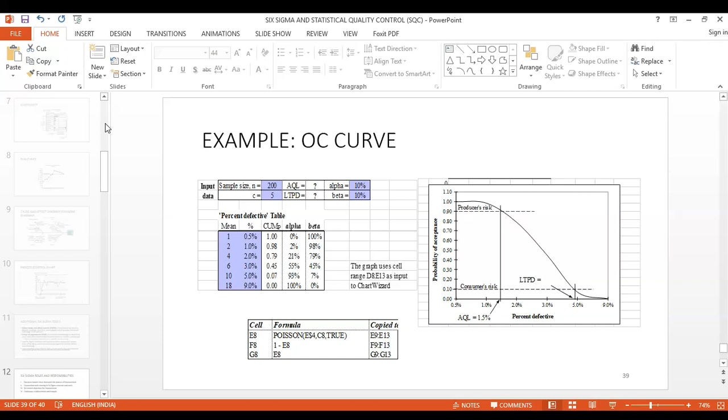Hello, good afternoon. Today we will be discussing a very important topic in operation and supply chain analytics, and the topic is Six Sigma and statistical quality control.

Six Sigma is a very important concept. It's a philosophy and a set of methods companies use to eliminate defects in their products and processes. Many companies mention in their publicity material, website, or marketing presentations that they stick to Six Sigma quality in their operations, manufacturing processes, or service operations.

Basically the purpose of Six Sigma is to reduce variation in processes that leads to product defects. Ultimately, Six Sigma is a quality initiative, a quality method that companies use, and they want to reduce a measure called DPMO.

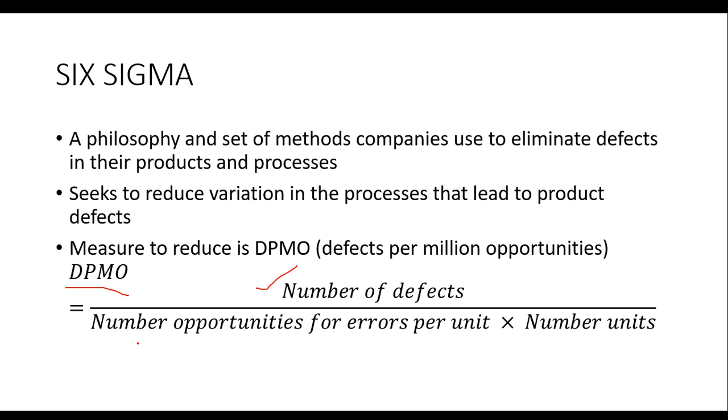The intention is to reduce the number of defects in a service process or manufacturing process, manufacturing unit, or service instance, to reduce the defects per million opportunities as much as possible. You can only reduce something when you are able to measure it, so DPMO is a good measure.

So in Six Sigma, the way to go with this method is the DMAIC cycle, which is a very popular acronym. D in DMAIC stands for Define. In Define, you identify the customer and their priorities.

In M, you Measure. Once you know what specification the customer wants, you determine how to measure the process, how to measure that particular specification or parameter or quality characteristic, and how it is performing. Once you measure it, then you Analyze it.

You analyze what is causing that defect or that particular problem or issue. Once you measure it and know it's above a limit or problematic, you analyze the likely causes. And once you know the causes, you try to remove those causes of defects - you try to Improve on it.

And then next is Control - how to maintain the improvements and keep continuously improving. The DMAIC cycle is an ongoing effort. Once you do a DMAIC cycle, you improve the quality to the certain specification you want, and in future you want to repeat it so that some other parameter would have gotten a defect.

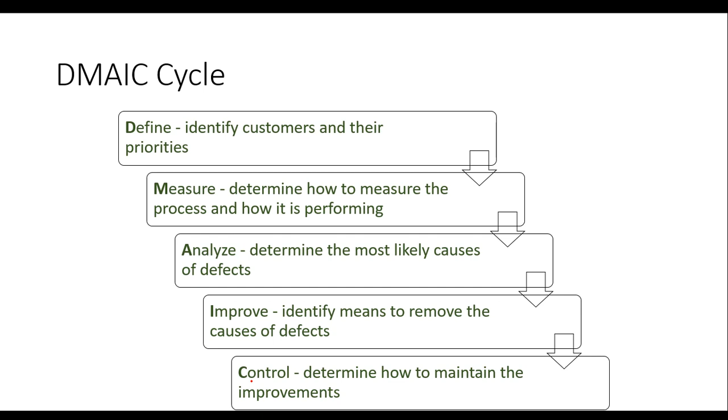So what are some quality tools in Six Sigma? First is a flow chart, which you use once you try to operationalize Six Sigma. Some analytical tools are helpful, and the first tool is a flow chart which gives you a sequence - I'll show you in a while. First is a flow chart, which is a diagram showing sequence of operations.

Then there are run charts, which show trends in data over time. Pareto charts - we'll take flow charts and run charts, then Pareto charts help break down a problem into components. Check sheet is a basic form to standardize data collection. Cause and effect diagram, also called fishbone diagram, shows relationship between causes and the problems due to those causes. Opportunity flow diagram is used to separate value added from non-value added in a flow chart.

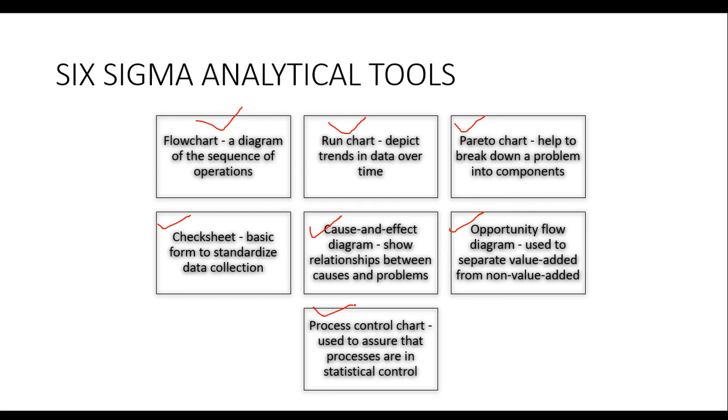In process control chart, we will be discussing in detail today. We will be looking at how to assure that processes are in statistical control. So let's quickly look at these one by one.

First is a flow chart, and it shows the major steps in a process. It's a simple process shown here where you're trying to take a photocopy of an original document. So process steps are: put original in the glass, close lid, adjust setting, press start, and remove. Once your copy is done, you remove the originals, right? These steps can be easily shown using the flow chart, showing the suppliers, the input, the process, the output, and who the customer is.

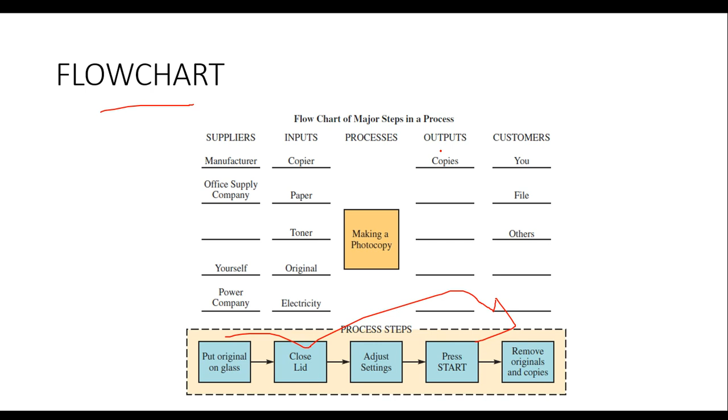Next is the opportunity flow diagram - the same flow chart where you put what is value add versus non-value add. You can see the same diagram of taking a photocopy of a document, where all the value-added activities, where some activity is happening that adds value to the whole process or flow, is shown on the left side, with a dotted line separating it. On the other side you put all the non-value add activities. Sometimes you can also highlight value added versus non-value added using colors, but most of the time we show them in two separate sections.

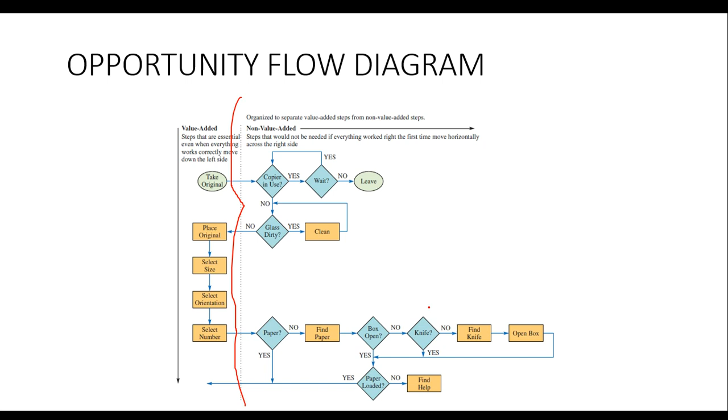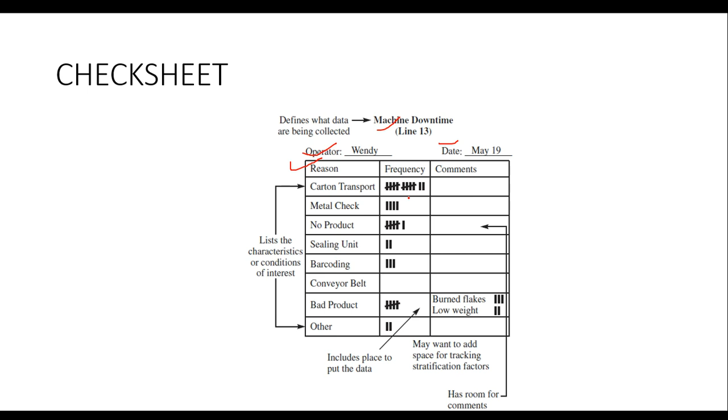Next is the check sheet, used when you want to collect data - this is important for data collection efforts. The check sheet basically defines what data is being collected. Suppose someone on the factory floor wants to track machine downtime and see the common causes. A particular person on a particular date records the reason for machine downtime. All the reasons are put in one column, the frequency of each problem in the second column, and comments are also given. This way you can easily check the most common causes for machine downtime and take steps to improve on that.

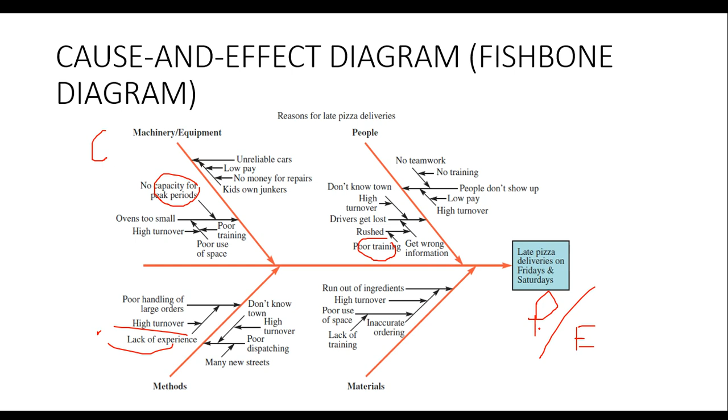We further break down these machine-related causes one level down, and if we keep drilling down, we can figure out that maybe it's capacity issues for peak period, and maybe poor training, or it could be lack of experience of the cook to handle large orders. These are the possible causes, a few among the many causes which are eventually leading to the effect or the problem. Once we are able to figure them out, we can take efforts to address those causes and improve on them.

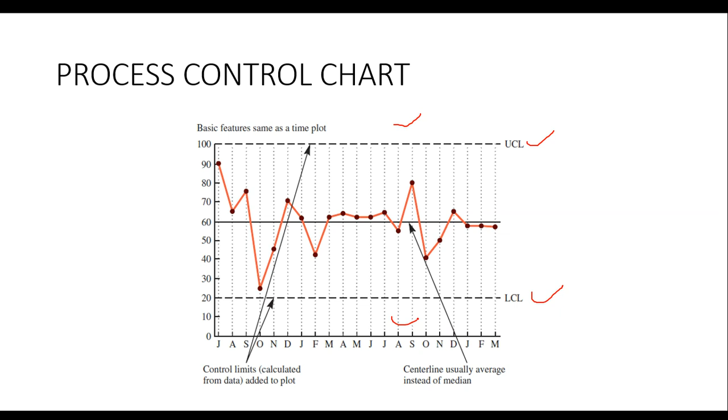Next is process control charts, using statistical quality control. We look at some characteristic of a process, measure it, and it shows the mean line, the upper control limit, and the lower control limit. If the process characteristic we are measuring remains within the upper and lower control limits, that is okay - it should be around the mean. But if it goes above the upper control line or below the lower control line, then there's a problem, and we should try to address it. The center line is usually the average, and we will discuss more about process control charts as we cover statistical quality control, which will give you more clarity.

A few other Six Sigma tools used are failure mode and effect analysis, FMEA. What you do is look at the possible failures at each stage of the process, identify them, and then estimate and prioritize the possible risk at each stage. Once you know the different risks in each stage, you prioritize them, then evaluate and try to address them.

Design of experiment is a statistical methodology to determine the cause and effect relationship between process variables and output. Suppose you have many process variables - you permit experimentation with different combinations of variables and their values, and determine the effect on the final quality characteristic that you're interested in or want to control.

Lean Six Sigma is also very buzzword nowadays. Basically, Lean Six Sigma combines the quality control tools of Six Sigma with the inventory management concept of lean manufacturing. So it's about reducing waste and keeping inventory wastage as low as possible, while putting Six Sigma process control in place to achieve high quality with low wastage and low inventory.

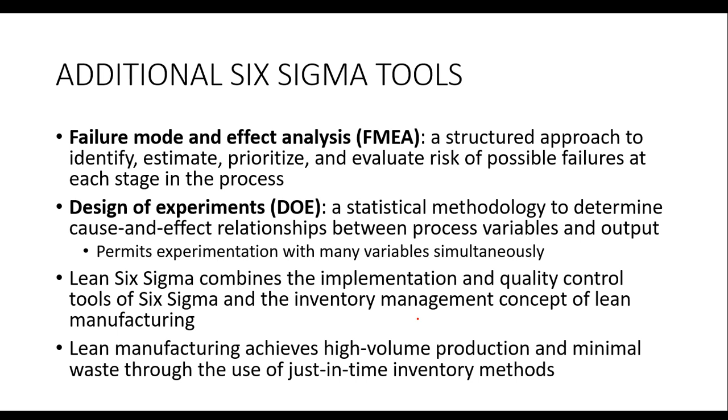Lean manufacturing is very popular nowadays. It's basically about minimal waste and using concepts like JIT, just in time inventory methods. You can always mix it with Six Sigma and come up with Lean Six Sigma in service operations or in manufacturing operations. So what are the roles and responsibilities when an organization is trying to implement Six Sigma?

Of course, the executive leadership must champion the process of improvements. So once top management is championing the cause, then you have corporate wide training in Six Sigma concepts and tools. Once people are trained and know about Six Sigma tools and how to implement them, management should give them stretch objectives for improvements, with continuous reinforcement and reward.

So it should not be a one time motivation. It should be continuous reinforcements, and reward should be provided so that people remain motivated and keep on implementing Six Sigma continuously.

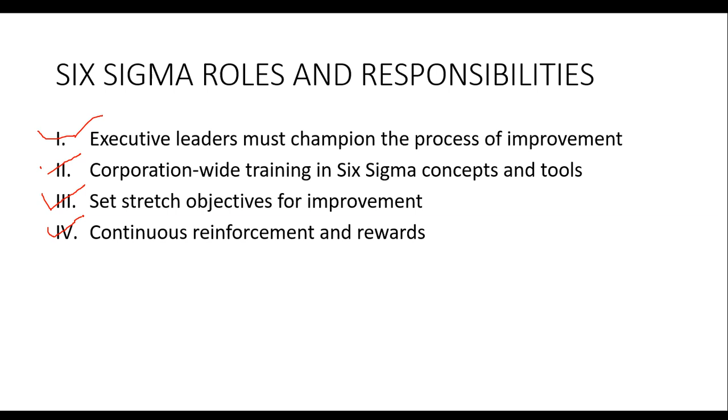So okay, let's talk about Six Sigma. So you could have made sense of the DMAIC cycle and using the different tools. Of course, some statistics is involved in implementing Six Sigma in detail, while it comes to service operations or service processes or the manufacturing operation processes.

So now let me take you through some concepts of SQC, or statistical quality control, so that some statistical terms that we use while we talk about Six Sigma become clear to you.

SQC is a wider concept than Six Sigma, and it talks about a number of different quantitative techniques to basically evaluate quality from the conformance. We want a certain quality characteristic to be of a certain, prefixed quality parameter value, and then we can evaluate quality whether it's conforming to that particular measure or standard, and then once we evaluate it vis-a-vis a standard, we know how to improve on it.

Because we know a process inherently has some variation. In manufacturing, and in service operations in particular, there's a lot of variation because humans are involved. But in manufacturing processes also, even machines are working, we have some variation in the output. We will discuss just in 2 minutes more about that.

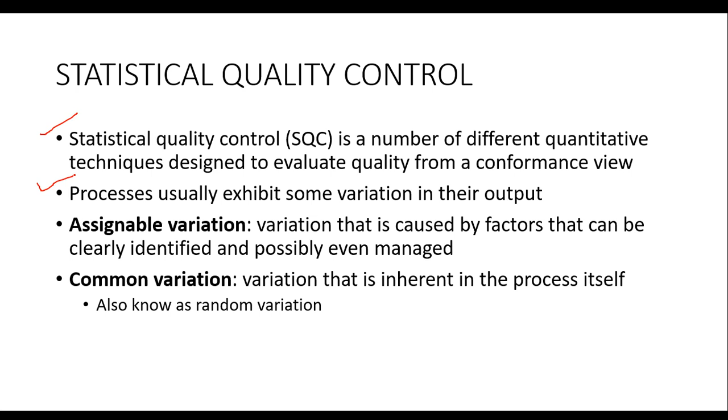So assignable variations are ones where we can identify the factors that are causing the variation, and then manage those factors. But some variations, common variations, are inherent, so sometimes they are also known as random variations. We don't know what the causes are, and however much we manage those factors, they still remain in the process.

So one common way to measure variation is the mean. So you have the average value of a set of numbers. Suppose you have an observed value, so you have a sample of n, and n can be any number, let's say 10. So in 10 observations of, say, a diameter of a tool, which is supposed to be 1 inch, you observe it's 1.1, 1.2, and so on. You average those observations over the total number of observed values, and you get a mean.

In a set of numbers, standard deviation is a measure of variation, and the variation will be around the mean, of course. So standard deviation is a measure of variation in a set of numbers. It's denoted by a sign called sigma.

There are many different ways to calculate it, depending on what distribution it is following: normal distribution, Poisson distribution, or uniform distribution. But one common way to calculate standard deviation is: take the observed value, the difference from the mean of the sample, square it, sum it from i to n, take the square root, and divide this by n, the total number of observed values.

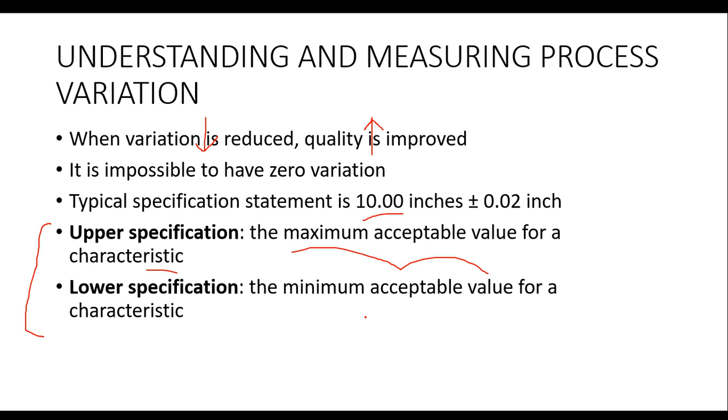So let's talk about two things which are very important: specifications. When we talk about upper specification, it's the maximal acceptable value for a characteristic, and lower specification is the minimal acceptable value for a characteristic.

You have to understand there is a difference between process limits, process control limits, and specification limits. Suppose we want to measure process capability. Capable means the mean and standard deviation of processes are operating such that upper and lower control limits are acceptable relative to upper and lower specification limits.

So if the upper and lower control limit, or the variation within the process, with a certain high degree of certainty - so process variation is less than what variation is allowed by the customer - then we say the process is capable. In other words, process control limits are less than the customer specification limit.

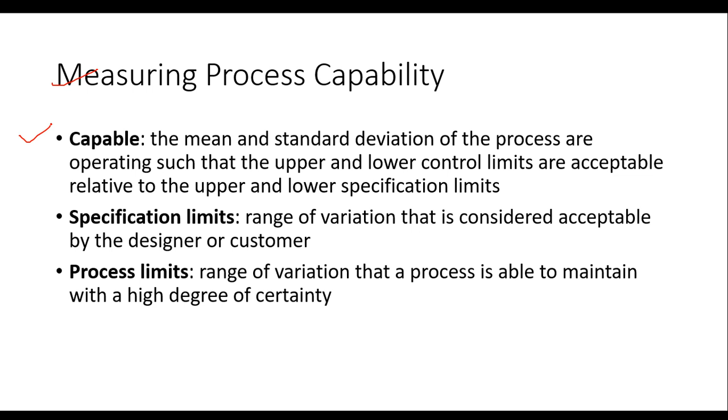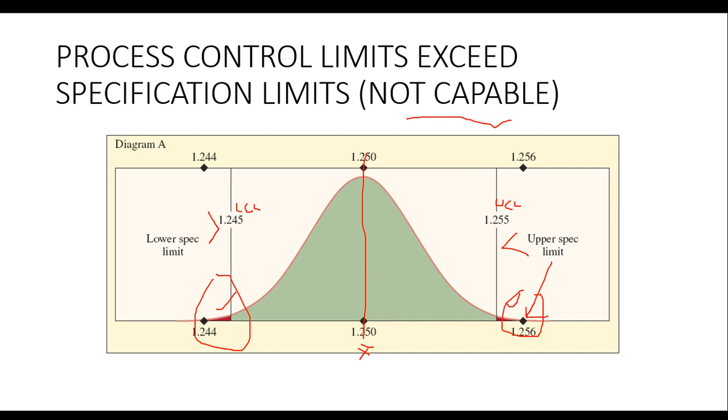But you can see your process specifications are here. This is more than that, and in the negative sense it is also more than this. So you have variation here and variation here. This means the process is not capable because your process is varying more than what the customer would have allowed through using control limits.

Let's see one example. Here it is lower control limit, this is upper control limit, this is something that is allowed by the customer, and here is your process. Now the mean remains the same, but the process upper specification limit and the lower specification - now you can see they are less, and here this is also in terms of negative it is, yeah.

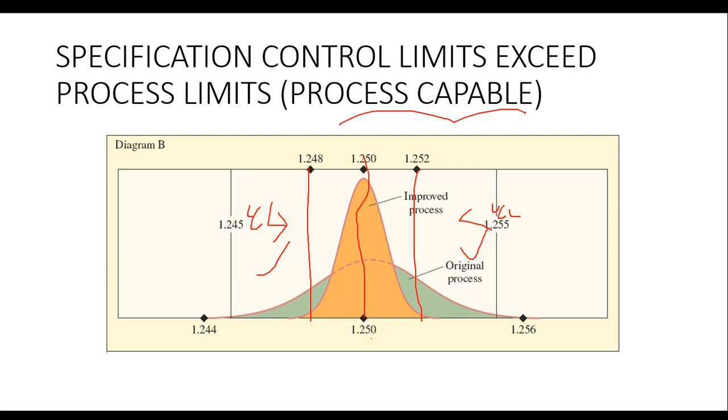So this is good and this is good - now you can say your process is capable. Your process specification, the variation in the process is less than what the customer specification or design specifications are for that particular process. How do you measure it?

One way to do that is with a ratio. We have a process capability index. It's a ratio of the range of values produced divided by the range of values allowed. So basically...

Process capability index, CPK, is equal to the minimum of either: mean of means minus lower specification limit, divided by 3 sigma (which is 3 times standard deviation); or upper specification limit minus mean of means, divided by 3 sigma. This shows how well the parts being produced fit into the range specified by the design specification. Normally we would like to have CPK larger than 1. So if the minimum of these is more than 1, that means the process is capable.

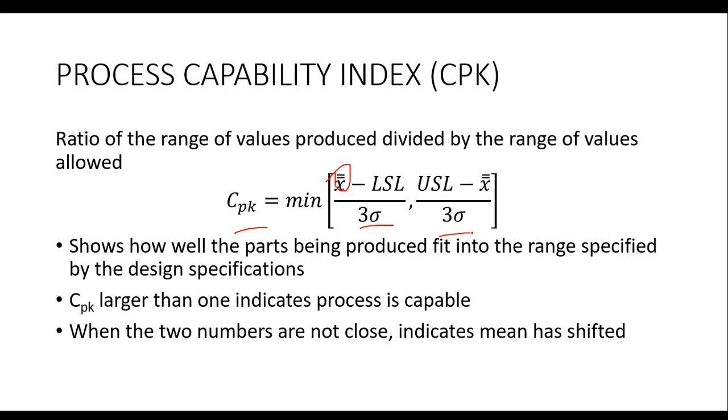When the two numbers are not close, that means it has shifted. Let's look at one example where there's a manufacturing process where you're putting pressurized oil in an aerosol - like putting a deodorant in an aerosol can.

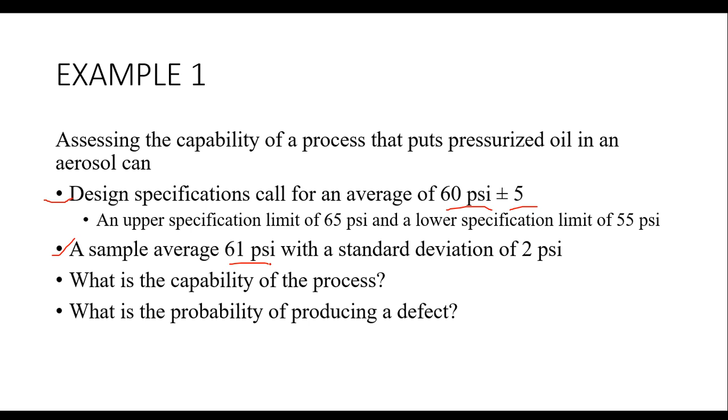The design specification says the upper specification limit is 60 pressure plus 5, so 65, and the lower specification is 60 minus 5, so 55. So 55 is lower control limit, 65 is upper control, and average is 60. Then you figure out the sample average, which is mean of means, is 61 psi pressure, and standard deviation is 2 psi. Let's figure out whether this process is capable or not.

First we interpret the data: lower specification limit is 55, upper specification limit is 65, mean of means is 61, standard deviation is 2. We calculate the process capability index, which is the minimum of 1 or 0.667. It comes out to a minimum of 0.667.

This means it's not a very good capability index. This process capability is not good, and it can definitely be improved. We can also use this information to calculate the probability of a defect using statistics, and Z, as we all know, is the difference between observed minus mean of means divided by standard deviation.

So Z at 55 is minus 3, and Z for 65, upper control limit is 65 minus 61, that is mean, divided by sample standard deviation. It comes out to be 2, and we find the P value at both points. P value at minus 3 is 0.00135, and at normal distribution for 2 is 0.0228. So P of less than 55 or more than the upper area comes out to be 0.024.

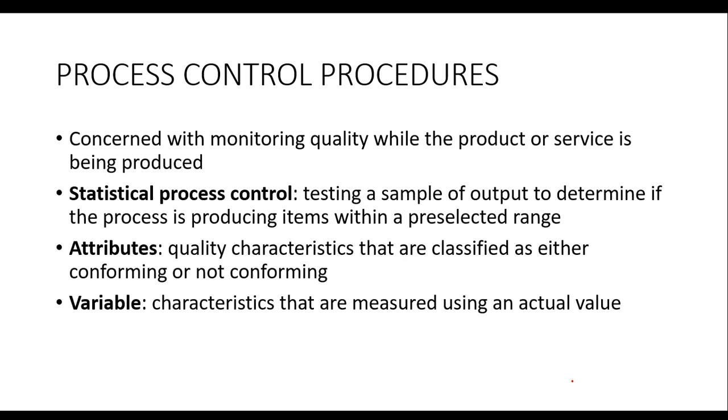Suppose we are making an aerosol can, just for example, and we take the pressure in that can. This is a variable, a characteristic which we're going to measure - we actually measure the pressure, and this is a variable of interest to us, a quality characteristic. Whether it conforms to 60 psi or not, that could be an attribute, a quality attribute that needs to be adhered to. So we measure the variable and then see whether it meets the particular attribute value assigned for quality measurement or not.

Process control charts were explained earlier in this presentation, but we'll come back to it. Once you have the lower control limit and upper control limit, you measure this characteristic, and the center line is of course the mean. Then you keep measuring this quality parameter, the particular variable, taking values, and it stays around the center line, which is normally the mean. If it is around this, it's normal behavior. But if one point goes above the upper control limit, that is a cause of concern. And if there's a point below the lower control limit, then we say the process is going out of control and we need to put it back in control.

If there are 2 points near the upper control limit, also investigate for the cause of poor performance. Similar for 2 points near the lower control limit. 5 points on the same side of the mean line and continuously rising also calls for concern. Similarly for the downside. A trend in either direction is a cause that it may eventually go out of control, so that needs to be checked. Same for a sudden change in level or erratic behavior - that needs to be addressed.

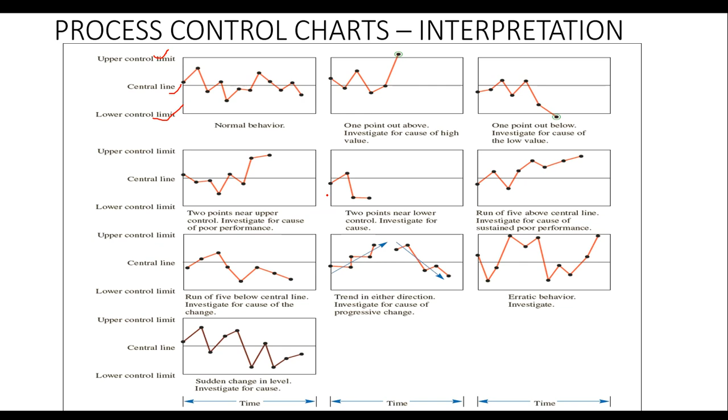So if we are measuring the quality parameter or variable and plotting it on a control chart, we can keep the process in control through graphical inspection and take remedial steps. There are three things which are very important when we do these charts - three types of control charts that are very popular. One is called the P chart, then X charts and R charts. Let's look first at the P chart.

P charts are basically used when an item or service is either good or bad - a yes or no decision. We normally say P bar is the total number of defective units from all samples divided by the number of samples and sample size. This is the formula. Standard deviation of the sample is basically this probability times 1 minus P, divided by the sample size.

Upper control limit is the probability of defective units among all the samples plus Z times the standard deviation of the probability curve. Our lower control limit is the mean value minus, or this probability of defective units among all the sample units, minus Z times the standard deviation, SP. In this case either it's going to be 0 or this value P minus Z times SP, that's the lower control limit, and upper is P bar plus Z times SP. We normally take Z equal to 3 because of the 3-sigma rule.

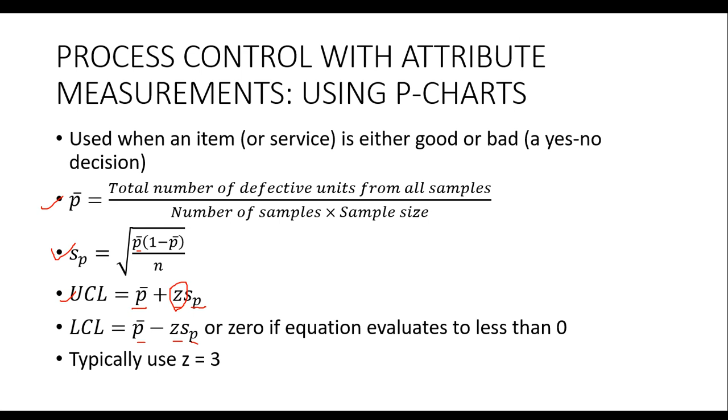Let me show you how to create P charts. First we calculate the sample proportion for each sample - we're going to have one solved example that will clarify this. Then we calculate the average of the sample proportions, calculate the standard deviation of the sample proportions, calculate the control limits, and plot the individual sample proportions.

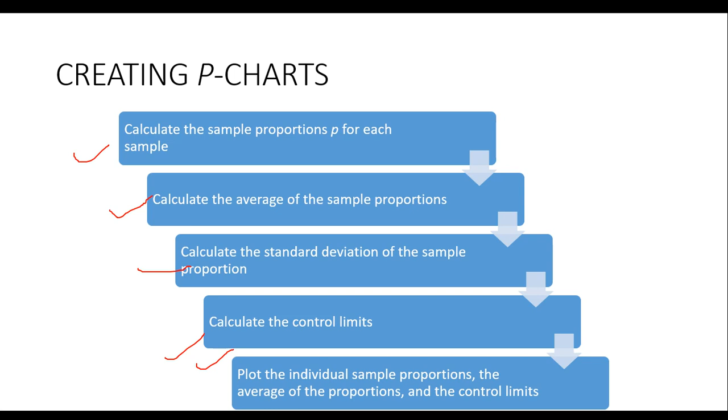Let's look at this number. We have 10 samples, and in each sample we have 300 units. These are the defective units, the defects. So you can see this fraction defective is 10 divided by 300, this is 8 divided by 300, this is 9 divided by 300, and so on for all 10 samples of 300 each. So total sample is all samples, and the total size is...

3000. Among all 10 samples, the total number of defective units is 91. So this p bar will become 91 divided by 3000 for the 10 samples with sample size 300, which becomes 0.03, and the standard deviation SP is 0.0099.

So upper control limit becomes p, which is 0.03, plus 3 times 0.0099. Upper control limit becomes 0.06, and lower control limit is 0.03 minus 3 times this, so it becomes very small, around 0.00063.

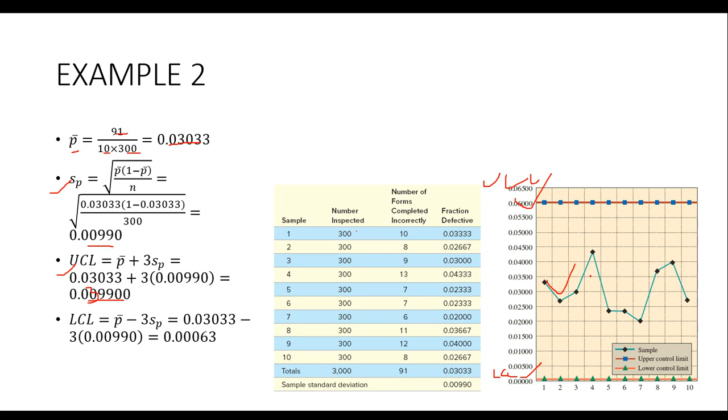So this is the upper control limit, this is the lower control limit. Then you plot all these fraction defective values here, all the values here, and clearly all of them fall between the limits, so our process is in control, we can easily say that.

X chart and R chart, we draw using the same approach, but for the X chart, the upper control limit is the mean of means plus A2 times R bar, and the lower control limit is the mean of means minus A2 times R bar.

Normally when we take a sample, the size is small, around 4-5 units, but the number of samples can be 25-30, a large number of samples. There's a trade-off between cost of sampling and the benefits of it, so you have to balance the cost of sampling against how big you want the sample size, the sampling effort, to be.

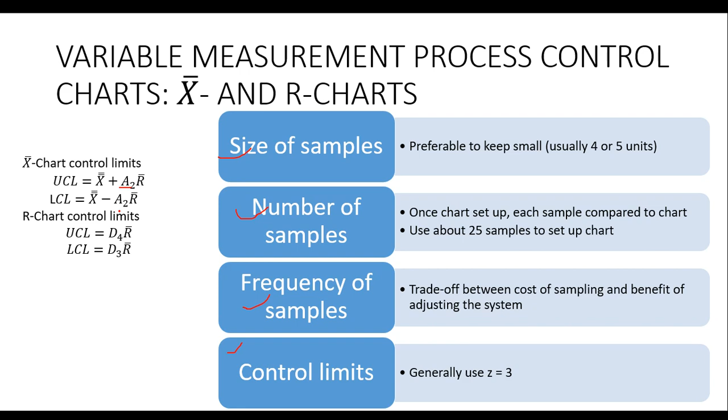For the control limit, this value is A2. Normally we take this value to be around 3. This A2 is basically like a Z value, and like I showed you earlier in P charts, here also we take this value to be 3. So let me give you an example using a can filling machine in Microsoft Excel.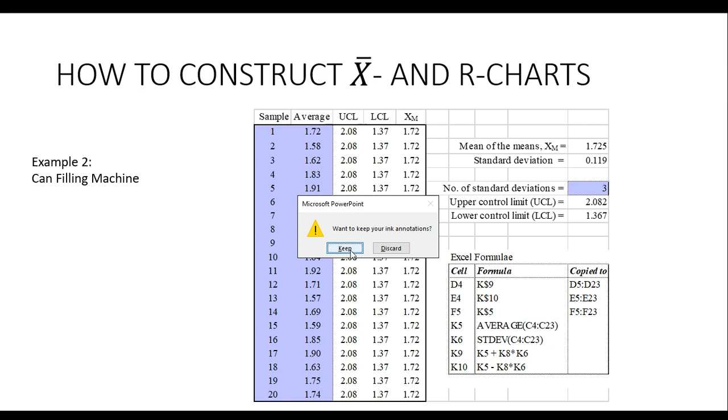If we come here, you can see we have taken 20 samples, and for each we take the average. And here is the mean of means, meaning whatever the sample means are, we have taken the mean of those again.

So we can say equal to average, and we can select, and then this is the standard deviation of them.

The Z value we have taken as 3, so upper control limit becomes mean of means, 1.7, plus 3 times the standard deviation. So this value becomes this, and this is the lower control limit. The same values go here, all the upper control limit values here and the lower control limit here.

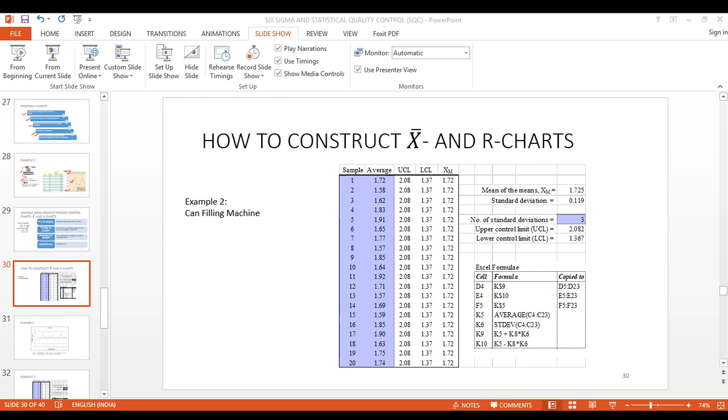Now let's come back to R charts. Let me show you how to calculate R charts, again taking you through Excel. In the R chart, of course, you have the sample, then you have the range given, and the mean of ranges, which is the average of all these ranges.

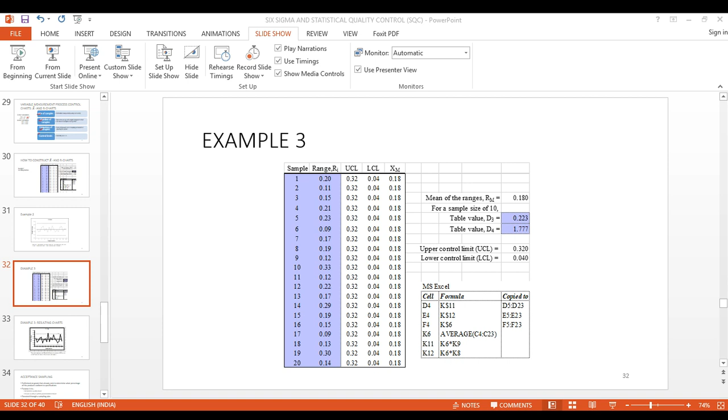Now let's look at, so we just discussed an ongoing process, but sometimes in a warehouse you get goods delivered to you. So far what we have done is, at the organization level, how to set up the quality process using Six Sigma. Then we understood what is statistical quality, and some tools available to us. Then we said, suppose some process is running, how to implement sampling, how to implement the quality process measurement and statistical quality control into it.

The next case is suppose you have a finished good, you're dealing with finished goods in inventory, you export or import some item, and the goods have come to your warehouse, and in the inventory you want to see what is the quality. So one way to do this is, on goods that already exist, we try to figure out what percentage of the product conforms to specification.

And then we try to do it, why we do that is to determine the quality, and make sure that once we know what is the quality level in that particular inventory, the quality is within the predetermined level.

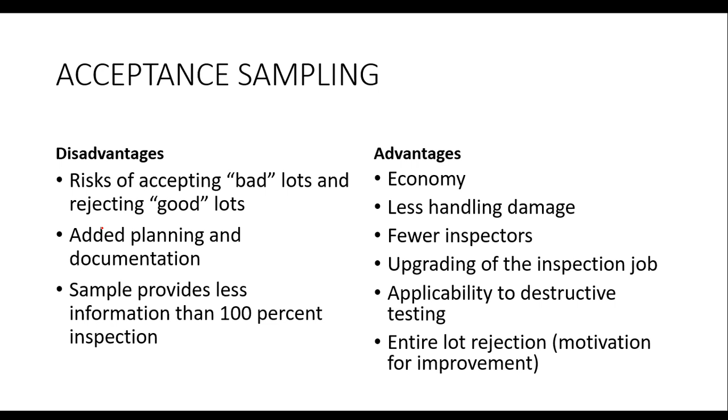So how to go about designing a sampling plan: suppose you sample n units from a lot, sample size is n, and then maximum number of defective items is c. So you decide on how many maximum defective items c are allowed.

AQL is defined as the maximum acceptable percentage of defectives defined by the producer. So if your producer says, sir, kindly accept the lot if more than 95% of the product is okay.

And then there's another thing called, from the producer side, this is also called the producer risk. And the lot tolerance percent defective is the percentage of defective that defines a customer's rejection point. So this is the consumer risk, lot tolerance percent defective. So producer risk, alpha, is the probability of rejecting a good lot, and beta is the consumer risk, the probability of accepting a bad lot.

So producer risk alpha is, suppose you send a good lot, and luckily, 95% from your side are okay, but they take a sample and all 5 units in that sample are defective, so your lot will be rejected, even though 95 are good. So that's a risk you have.

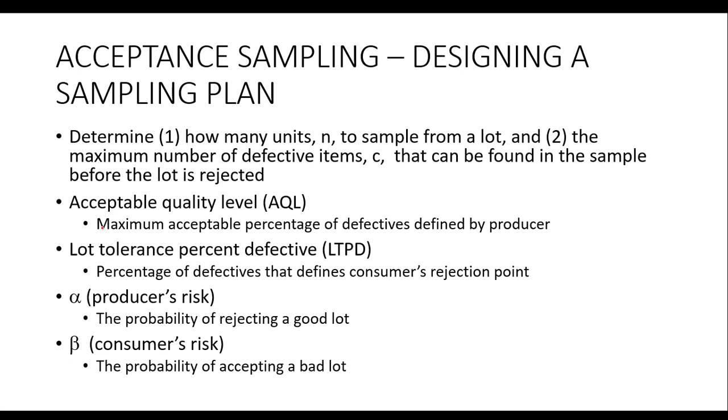The way we measure this in statistical quality control is through the operating characteristic curve, called the OC curve, and it shows the discriminative power of the acceptance sampling plan. So what the OC curve does is, on one side your probability of acceptance is on the y-axis, the probability of accepting a lot, and here is the fraction defective.

And when you do it, the sampling risks are known to you. So I just gave you an example: we stick with n equal to 99 and c equal to 4. So you can see here, this is approximately 5%, this is the producer risk.

At 5%, normally you can say 2 products, and this is called AQL, acceptable quality level. And then you keep on increasing it. So beta, which is consumer risk, is 10%. Probability of acceptance goes below 10%, so this becomes beta, which is 10%, and here is alpha at 5%. This point, percentage defective, is called LTPD, lot tolerance percent defective.

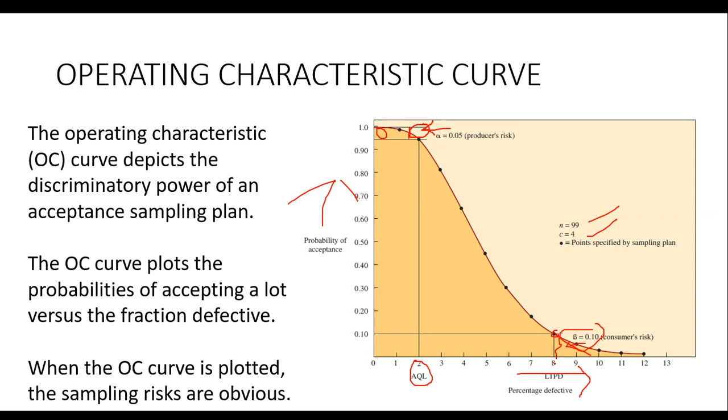Okay, so let's go through an Excel example and try to see. AQL is also defined as the percent defective that the plan will accept 95% of the time, and LTPD is defined as the percentage defective that the plan will reject 90% of the time.

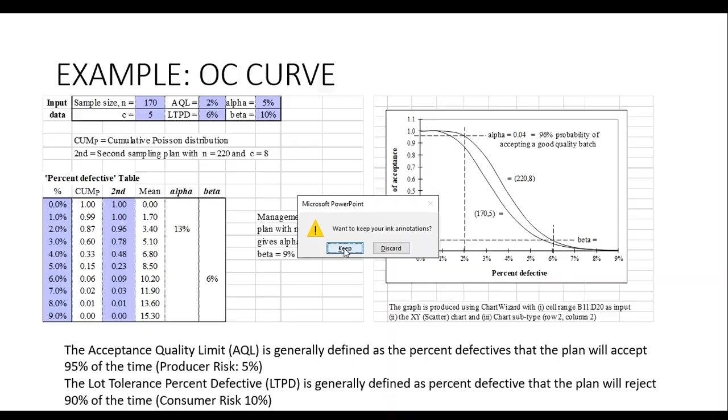Let's go through one example in Excel. There are two samples here. First sample is n=170 and c, the number you allow, is 5. Then we change n, sample size, to 220, and the number of defective units allowed in the sample to 8. At this level, AQL for the first is 2%, and for LTPD alpha is 5 and beta is 10.

How do we do that? In the first case, we have cumulative probability and percentage defective. This is for the first and this is for the second. You come up with this, and of course this OC curve follows the Poisson distribution. So you have probability of acceptance here, and probability defective, percentage defective, here.

So E4 in this case is C, which is the number of defective units you allow, which is 5. Then you choose E11, which is percentage defective from here, and then you put TRUE. So this gives you the cumulative probability of accepting.